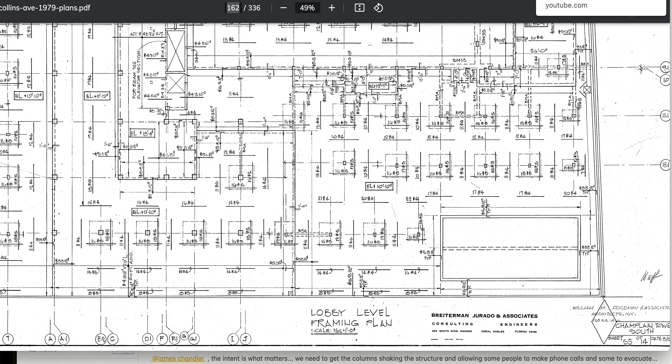Let's get to what my breadcrumb was. I keep telling you guys, I don't know what this BMA is. If I tell you, is it a lateral brace? Come on. And then in the same video, I tell you that this is a transfer beam, and I show you the photographs of how it works. Where is it? We're going to get to my amygdala videos. And I show you in this video what a transfer beam is and how it works. Where's my image? Really?

You suck. Oh yeah, that's my movie. Oh, somebody else liked the movie. That was cool. I saw that in the comments.

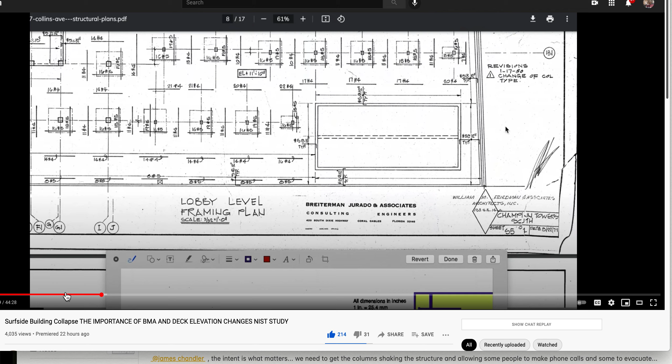Alright, well, so much for that. This one, yeah, so I show you how the beam system works where it steps up the elevation change.

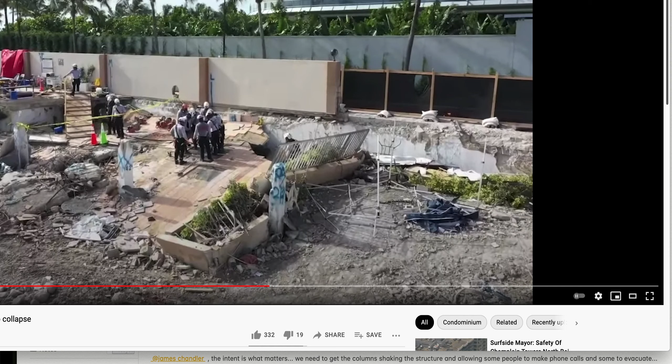I thought for fun I'd do a troll video to show the troll, do at least one troll video that's going to get blocked. I've been in a lady's house, all right?

The one in 611, been all through this video. Some inconsistencies with her stories. Think about it though, she went down to the garage, all right? Do you think this lady uses the stairs every day? So she blew off the floor she should have got out on. So she went to the garage, or maybe she was going to get her car to leave. But she wound up in the garage and then had to come back up. Come on, she never used the elevator, I mean the stairs, so she doesn't know what floor it gets off on. I'm going to give her a pass on that. So we don't have to pick on the lady's story about inconsistencies.

She woke up, she survived. That's the amygdala. She feels strange sounds. I'm gonna give you a teaser in this, the amygdala woke her up. That's why I wanted to say how the amygdala can save you in your sleep. Here it is, the amygdala woke her up. She was asleep, she was off somewhere else in Daisyland. And the amygdala is always monitoring. I state that the amygdala gets data first. And if it's nothing, it means nothing. But if it's something deadly, as the building breaking apart, it wakes the human up and says, yo, we got to go into action mode.

Strange sound, and I run to my living room. And there she spots a crack snaking its way down a wall. The way she points at it, look, right, and then left. Something inside of me said, run. She saw the crack this way, something inside of her said, run. That's the amygdala telling her to process that data, and the amygdala took over, and out she went, all right? That's the amygdala. Her amygdala said run. She doesn't have, this is a lady that has auto run pilot. She doesn't have evaluate data. It's auto run.

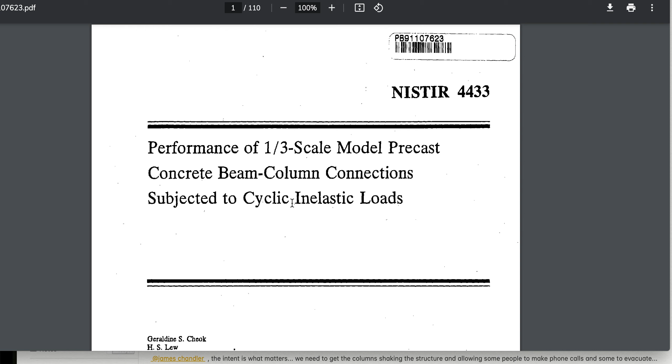So, all right, we're going to get away from that. I already told you guys what a BMA is. People are still asking, but this is concrete beam column connections, cyclic inelastic loading. You can look that one up.

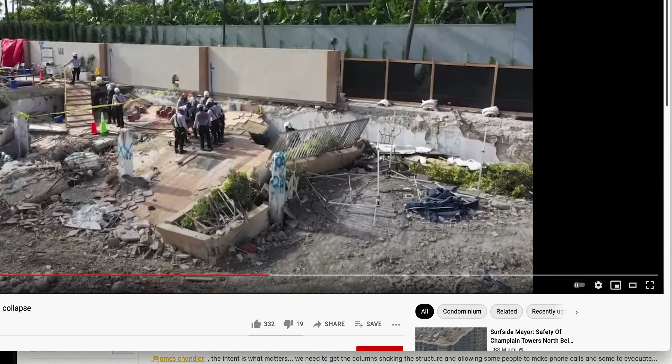Let's go, I'm trying to find the troll guy. Damn it, I guess I won't be finding that this evening. Yeah, that won't happen. All right, the guy that commented about the... we'll get to that model.

He commented about the math of the 11-foot elevation change, and it varies because the lobby is 13'4". Well, 11'10" plus 1'6" is 13'4". So his amygdala couldn't let him go, oh shit, you're right. So he writes back all this long answer about nothing wrong with my math, and then he does his crazy numbers to come to 13'4" by saying 2 inches plus this plus that. And I'm like, you know what?

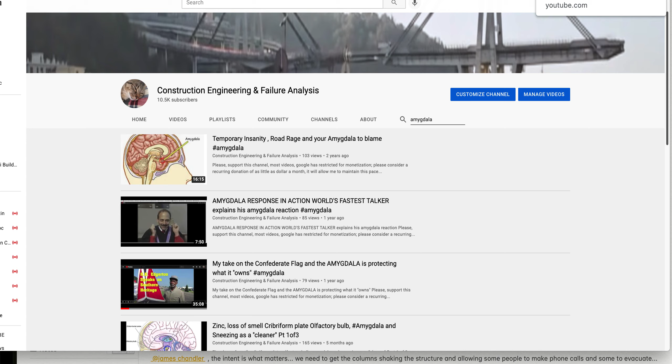One more comment. Oh, is it in this one? Is it in this video? Let me see here. Where's the math guy?

I don't have time for that, so I wanted to show it to you. This is the amygdala though, where the person couldn't admit that his math is wrong. But no, the person rather go back at it again, showing me why his math is correct, and yet it's the same damn math.

What is this? I'm confused on how to read the plans, and a few seconds later we see the plan show S5. Obviously the piece of the bottom corner looks ripped. It presents as ripped. It's a copy, so we don't know if it's actually ripped or whatever's going on there.

I think it's 14 to, well, whatever. Look, the plans are the plans. They're all submitted on this. So we can argue about the dates being the same.

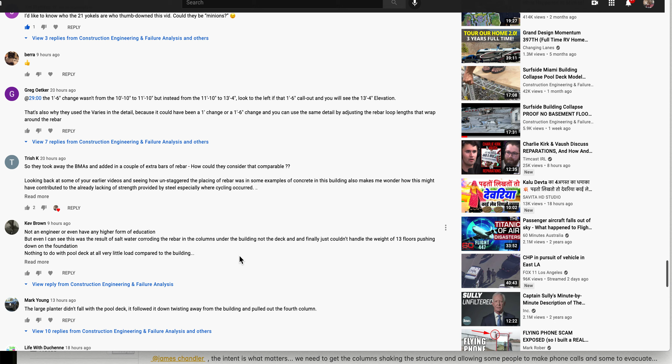So what happened? I don't know if this happened, but I would theorize that the person put the smoke and mirrors in the change plans the same day. It's crazy. You submit the same plans twice, and on the second plan you say change column, but you have the BMA missing.

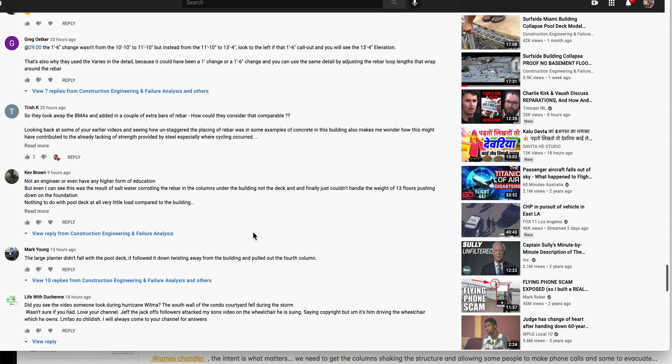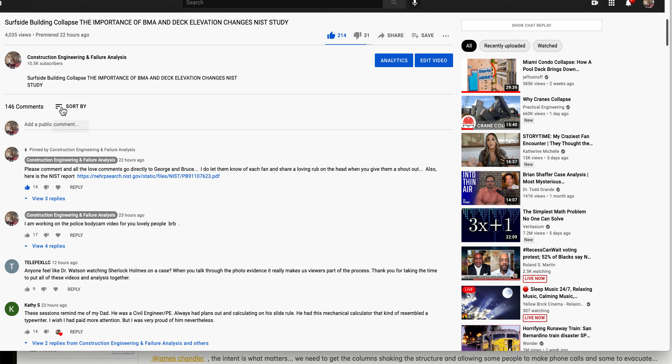So that was 146 comments. I don't know how this works. I'm trying to show you that mathematician person.

So we can get a good laugh out of his math. We might as well get a good laugh every now and then. We don't have to be so damn serious.

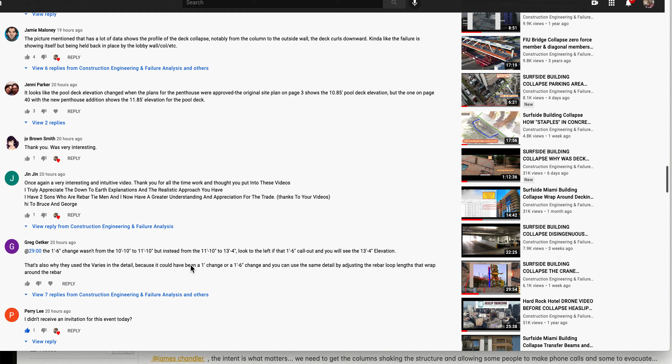Here we go, Greg, whatever that is, Oetker. At 29 minutes: the 1'6" change wasn't from 10'10" to 11'10", but instead from 11'10" to 13'4". Look at the left. Look to the left of that 1'6" callout, and you will see the 13'4" elevation. That's also why they used 'varies' in the detail, because it could have been a 1 foot change or 1'6" change, and you can use the same detail by adjusting the rebar.

All right, look, 29 minutes. He says, look at it. The 1'6" wasn't from 10'10". It was from 11'10".

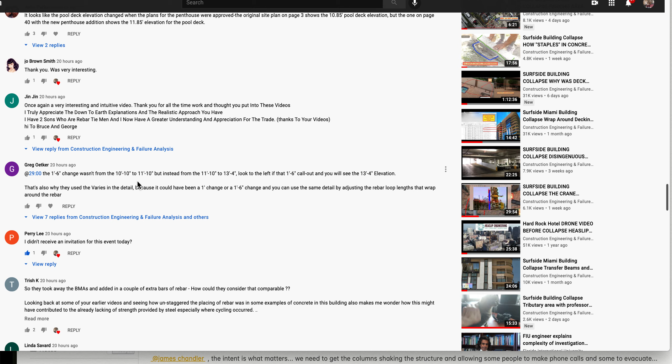Okay, 29 minutes, we click on this. Not change over to here. Pause. All right, there it is. Change. Come on, pause, point out. Come on, screen. All right, so slide this over. There it is, 2904.

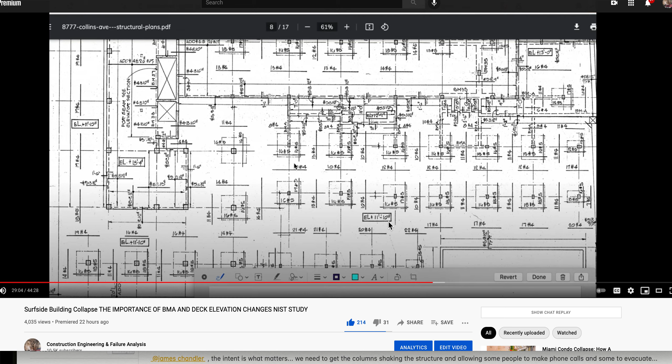Same thing, obviously. This is 11'10" right here, and that's 11'10". 11'10" and 1'6", you jackass, is 13'4". That's the lobby elevation. So 11 foot and 1 foot is 12 foot, and 10 inches. That's 12'10". Then you add 6 inches to that, and you get 13'4".

I don't have time for this stupid shit. So you come down here and you see this, and I told him, I said look, I answered him kind of like the way I answer, just give him the answer saying no, you're wrong, your math is wrong. And then 7 replies: 'Looks like I missed something.'

I don't know, Jamie, I couldn't open this. I have no idea what that is. I had to amend my reply. I thought he found something, but it was my steps. I thought he was giving away my little breadcrumbs on the 4th step.

But I already gave that away in another video where I said, look guys, it's 3 steps up, and now there's 4 steps over there. I thought he was referencing that, and then I realized, oh shit, no, I'm wrong. So I did right, don't give it away, please, because I already told him about it.

1'6" and 11'10" equals 13'4". That means the 1'6" stands true in the statement, and you are mixing up the math a bit. It happens. I gave him an out.

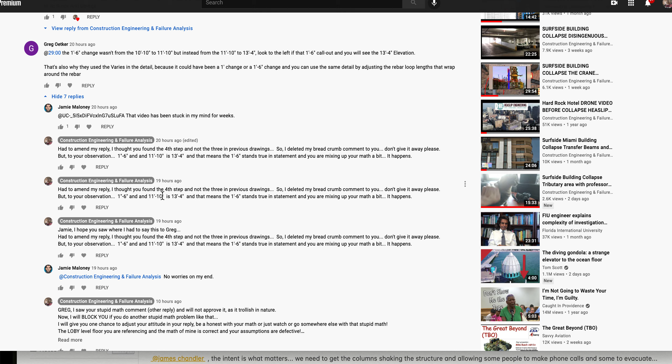He wrote something, so I had to reply. I didn't post it, I said I had to amend my reply. I thought you found the 4th. Well, it looks like I double replied. Whatever, Jamie, I hope you saw that where I had this right.

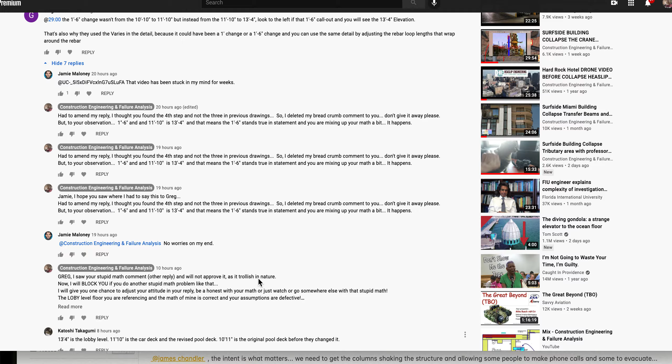Let's see, all right, so it looks like that. 11'10" is the car deck, and the revised pool deck. 10'11" is - that's the original pool deck before they changed it. It's 1'10". So yeah, you get the block if you do stupid shit like that. All right, back to this.

Where's my damn video?

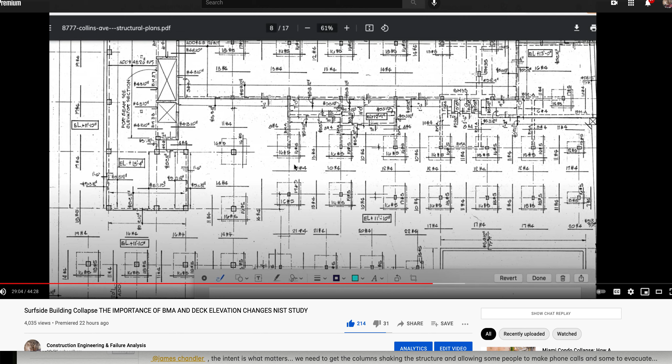And that would have been - let's see if I get lucky, yeah - how it's shaped like this, and how it transfers onto the column that way. Let's see if I can do this again. This time you'll understand.

I want to do it again, and then I want you to tell me what I'm looking at here, all right? I keep telling you, I gave you some breadcrumb about lateral bracing, and in the same video I tell you how this is a transfer beam, and it holds the load going across. And then I also tell you about how there's a 1'10" elevation change here.

I go out of my way to show you guys that, so I'm disappointed in a few of you that you didn't catch it. I showed this up here, and it's how it steps up over here - it's a 1'10" elevation change, a 1 foot elevation change.

Okay, so let's get back to this damn thing. Hold on, bear with me, it's got good content in it for you. So let me screenshot this, open this up, and do this for you. All right, let's do this again.

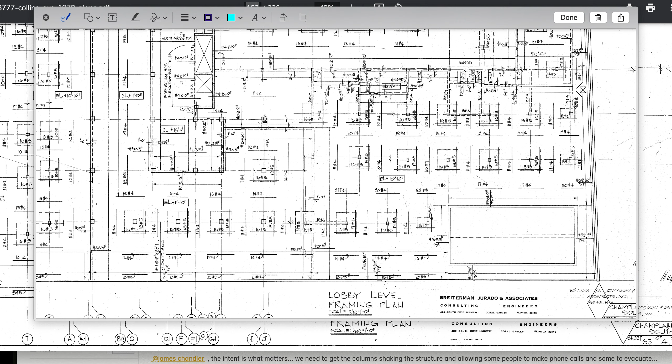Pay attention, people, pay attention. All right, here's your beam, this long beam in the background, going over to that wall. Here, let's do a wall - here's a wall, okay, that's the wall, that's the block wall. That's where this beam would have gone, right here, on top of that wall, or integral in the wall.

All right, so I'll just throw it there for now. I'll do that. Slab went that way. Nope - so it's a BMA, so it would be lower than the deck, and then the deck would go on top. So there's the BMA, right?

So let me text it. This is the BMA. All right, this is text, this is wall. Okay, wall - I guess I should have made it easy to read. I'll do this capital on that W, on the last L's.

So BMA - on top of that little bad boy is the floor. And this would be integral to this BMA.

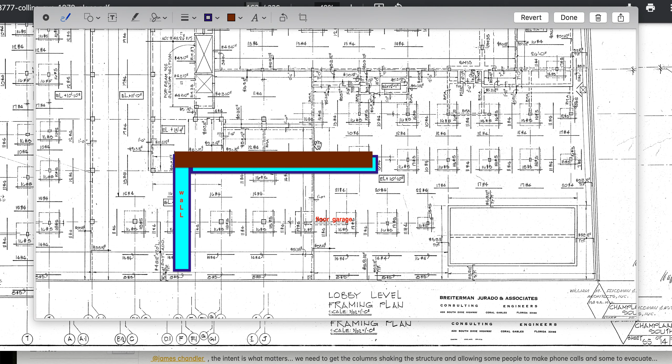Great, let's grab this down here. Let's put the floor - come on, floor. Really? Come on, hand, play along. There we go. So there's your elevation change, the BMA.

I'm sort of giving you a weird look at it, a detail of it. It does go that direction, all the way out to here, and then it turns and comes around. So this will be your BMA, and let's slide them over here - let's just do that.

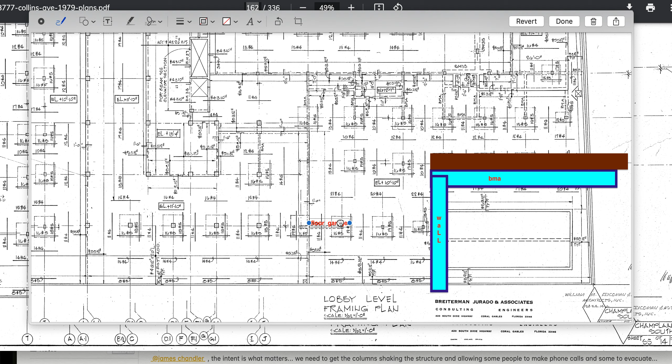So this would be the garage, the garage floor. Great. Okay, that didn't work out - whatever. Color red doesn't work, it hides right in the brown pretty damn good. Let's try a different color then, let's try purple - alright, so...

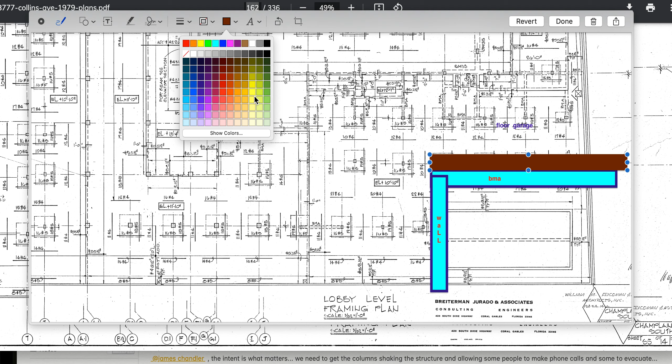Wow. You know what, this one needs to do a different color. Let's make that yellow, and there we go - so we got a garage floor now. Now, just putting it behind it, and so I just do a new text - so here's our garage floor.

Now it puts it on top. Here's our BMA looking from this direction. So your eyeballs are looking here, you're standing on the deck, looking at this garage floor. You'd have to step up about a foot from the pool deck, then you'll be on the garage area out here, right through the planter boxes, and out you go.

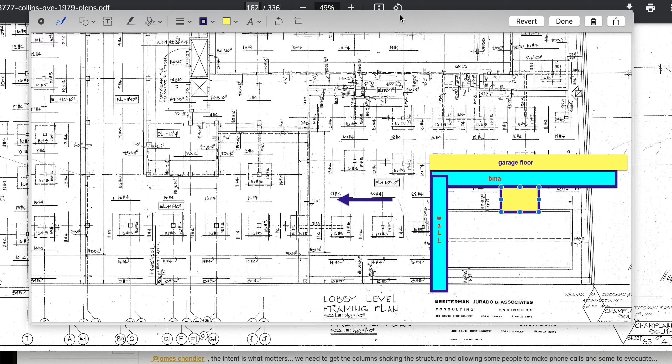Now, I talked about how this BMA works. That in between there is a transfer beam, and I put it in the other video saying 'oh, this is in the wrong place' when I said it, and that would be down. This little box here would be right here, it's in the other video. You guys see this little box there, right there, and that would be...

Let's see if I can just get the damn thing.

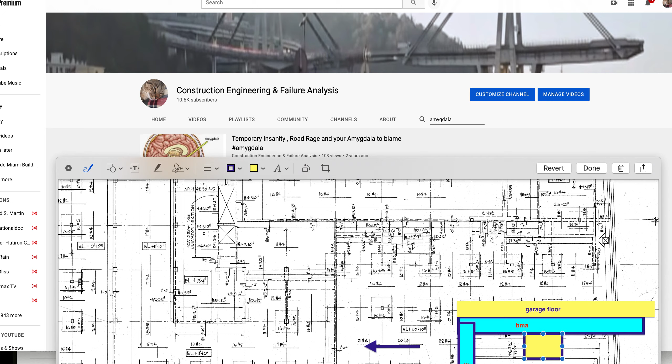So box, right there, and I said, oh, that doesn't quite belong there. That wasn't quite my breadcrumb on that one. The breadcrumb was telling you over and over again that this is a transfer beam that intercepts the weight on top of this one. And on this one, I said I can't figure out what this is, is it a lateral brace? It doesn't make sense to be a lateral brace there. Over and over again, this just tells me if you're awake, if you're paying attention about what I'm saying over here. But you guys aren't awake on me.

You're daydreaming, you're not extrapolating for me. This is a transfer beam. What is the intent of this? I kept asking, nobody's answering. It's a transfer beam also.

Here's the 1 foot step up. To do that 1 foot step up, they also had this beam going around, connecting to this beam, a BMA, over to here. And there was a beam that was going to go around here, same thing, the 1 foot was just going to go around like this. So how do I do that? That's good enough. It was just going around, just going around like that.

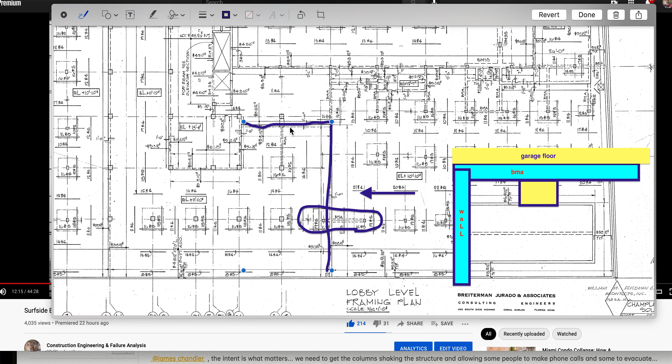And there's your 1 foot step up. That was the patio step up, or parking garage step up, and you step down into the patio area. That's the intent back then: 1 foot step up. You see where this beam is, right here? I'm going to show you in the next page now, let's go look at them.

This is in the way. Alright, so here it is in line here, see how we follow this column? See the line going across? That's in line with that, and there's that column. Now, next page.

That's without the BMA, that's without the beam there. There it is in line, see it going across in line? Now, there it is, going across, in line, 16 fives, 16 fives.

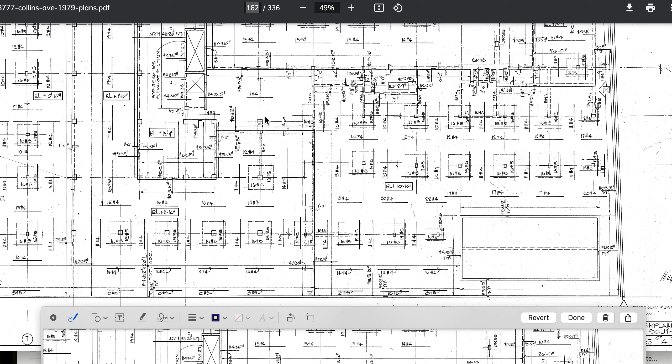Now, this was a BMA, it's not there anymore. They just added this 16 fives, they just put it over here, called it a day. But that's your answer again to transfer beams, we're adding transfer beams for you. That's why this was here, it's not a lateral brace. But you guys, when I kept doing this one, you should have pointed this out.

Now I got one more thing you should have pointed out when I keep giving you all this data. But I'm gonna stop, I think, on this video, and just load this one up, and I'll get you the next one and the next one. I'm gonna have to start giving out ass whippings for you guys not catching on.

This is a transfer beam, and this is also a transfer beam. Especially the engineers who watch me should call BS on me saying it's some type of lateral brace. Is this mass hysteria when I mention the word lateral brace? Am I getting inside your heads and making you think that? That was not my intent. My intent was clearly, in my thoughts, to say no way, just like you just said in the video, no way it could be a lateral brace. So then you guys should have said, oh, it continues over to here, it's a transfer beam for this 1 foot elevation change.

So I don't know if I'm any good with this breadcrumb thing anymore. I think it's the way I teach, though, I don't know if I'm any good at it. Obviously I suck if I mention in the same video this is a transfer beam, and then I show these beam locations, and we talk about a 1 foot elevation change, and I show it in the images, and no one extrapolates out that it's a transfer beam. So I guess I suck with that, or that breadcrumb thing. So I guess my breadcrumbs now, I'm just gonna have to be like, this is a breadcrumb, and then tell you what it is.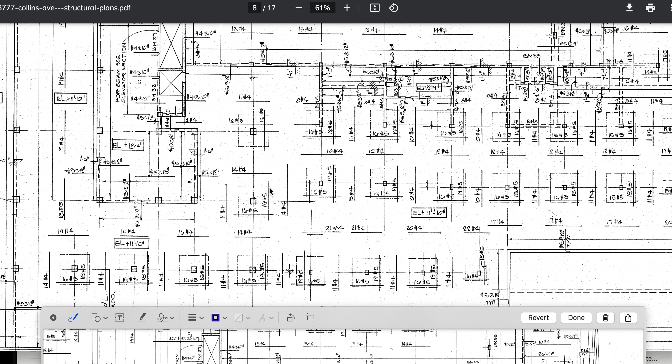So yes, there's your BMAs, there's your BMAs, transfer beams, transferring the loads, transfer beams.

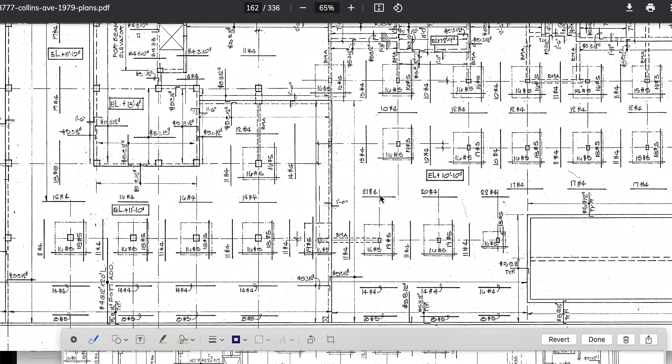As far as now, as far as the witness statement stating that they saw the garage go down first, and then this side over here, I think he saw the very beginning of it, the very beginning of it. I don't think he saw the cars down and then saw the floor go down. I think he saw the wave happen. So this punched first, and then he saw the wave transfer over to here. I don't think it was two different breaks, right? He saw the wave, he saw the wave, he went into freeze mode.

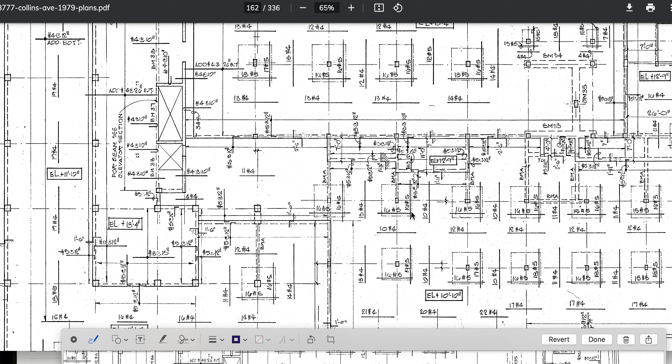Mama Bear comes, I don't know, through the apartment door here, but she said met him at the door somehow or something, right? Because she was like half in a robe, the daughter. And said come on, let's go. And she was more concerned about, I got to change my clothes, basically. And Mama Bear was like, let's go. And that was an immediate exit, with her with the robe on, and somehow she got clothes, right? So anyway, by the time she was interviewed later that night, she had clothes. I don't know who gave her clothes, because I thought she said she was in a robe. Robe of clothes? I don't get how she's dressed later that night when they're interviewing her. Where did she get the clothes from? That's something I would question.

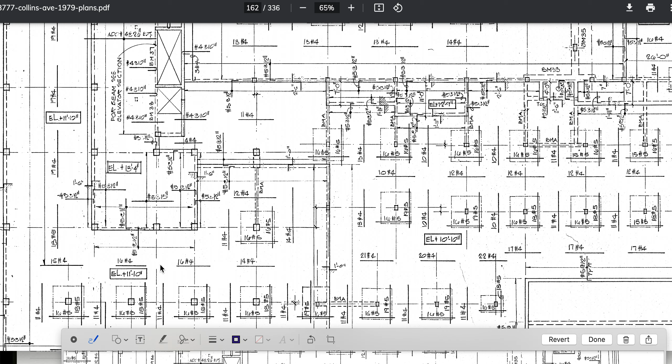Okay, so now you see our deck area is not just this direction. Our tributary failure area is not just the butterfly this way, but we have a direction this way also, because it's connected at the same elevation, 1110 and 1110, and this is 1110. It's the same elevation, all of this.

These cars go down. There's a fracture that's created, right here. There's a very odd fracture created right there. There's a very odd fracture here. Now, it could have been this: when this area collapsed, the building got tugged on from over here.

It caused a rattling, right? They all got the hell out of town. And when it finally collapsed, all the weight of the building just dropped through here and created this new secondary shear.

Or was it like that, even with the structure coming across and then rotating in? Which would then imply that this collapse, we have rubble over top of it at this point, that when the pool deck went down, it went all the way to here.

I don't have that in my mind because you remember he's out here looking, and he didn't say, 'Oh shit, right next to me collapsed also.' He said the parking garage area and the pool deck area collapsed.

Now let's address my first video I made on this. Remember we had a witness, I believe by that time, saying she made a phone call to her husband that there was a sinkhole in the, she called her lawyer husband, whatever apartment she's in, 411 or whatever, model girl, whatever she is. She reported the sinkhole where she saw, where her observations are, and that would have been here, and that's how she observes it from her vantage point, and her knowledge is what she thinks of when she reports it. I do my video from my cell phone, and I say that, and I'm like, what the hell?

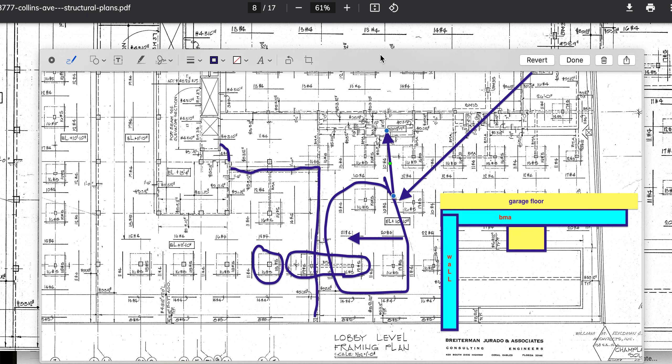In other words, it will want to separate. On this side, it wants to separate more so. Oh wait a minute, I'm looking at the... oh yeah, no, because the other drawing doesn't have... so I got to do confirmation. 10-4, right here it is. Yeah, this is the 11-10, 11-10. So here's the 10-4s, and there's 13-4s. So they match up because I'm working from the BMA installed beams.

Lily's here? Good. Lily's my other stray cat, guys. Lily only takes food. Can you give Lily some food? Because I don't have any food out for Lily. I think Lily is Bruce's sister. She stays here, but she won't come inside. I have a weird thing. I believe some cats are outdoor cats, and they don't want to come in, but they decide that they live with you, they're your house. They want to just protect outside. Well, Lily doesn't want to come in, cold weather or not, but Lily will eat the food off the porch and everything else, all day. I got to compete with the raccoons, of course, because the raccoons will eat it.

Now let's talk about, he was here when he saw this collapse. So when he saw this collapse, this is very interesting. What did they not say? What did he not say? He saw it collapse, and I'm assuming he's on the porch. That's an assumption, that he saw it from here, not from the window. But neither one of these witnesses talk about their floor pulling at this point, pulling away from them.

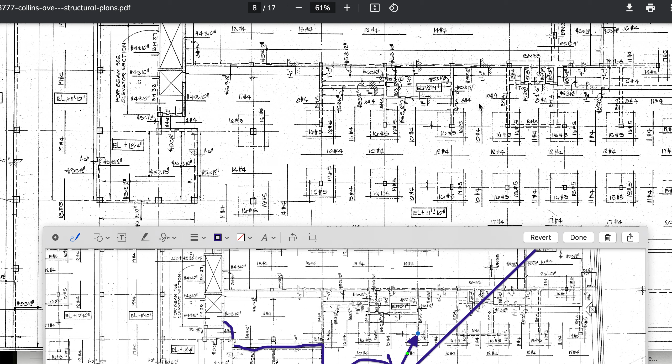The video takes place where they look down this ramp, and we all say it's part of a floor. Well, that would have been this thing tugged here, right? So we're going to cause some failure in these beams now and create a load path issue where the building's able to rattle and hold itself together for about

7 minutes, allowing people to get out. And she makes the phone call. I don't know how long the call is, but the building collapsed while she's in that phone call.

So BMA is getting tugged on from here, and here, after this puncturing happens here. Now so we get our tugging way out here.

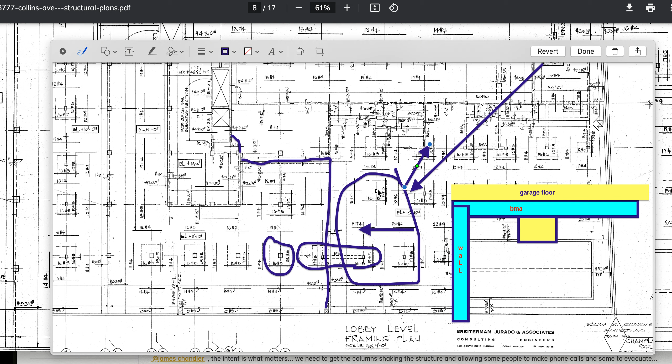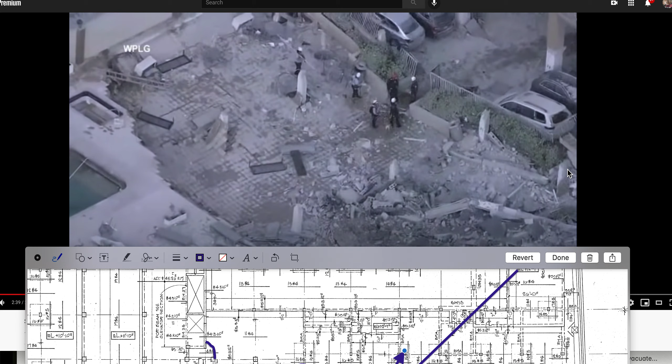Let's get to that. Let's see if I got an image of that one. Okay, so this would be this row here. Right, so there's that structure. This row right here we're looking at, okay, step back, column. This column here. I think that's the column right here. So let me get in line.

These 2 columns are together, and these are staggered. This is off the building where the cars are, so I can't see it in this one. Let's fast forward the video and let it play.

All right, let's talk about the drape first. So here's the drape, it's pretty much down to the middle, right here. Here's the drape, through, so there's our butterfly in the middle, and our drape goes up the other way. But I think that drape, the initial collapse, stopped right there.

I'm sorry, let's see, let's put it back. Let's put it somewhere thereabouts here, maybe. Let's try to stop the car. No cars are in here, so I got to put it back almost on his ass.

It's like right there. He sees this go down, and this would be like draped here, punching around this one, and draped down like that. So this would be from like this point down to here, and then back up to the wall.

I say towards the wall because at one point it has a, let's see, that would be that direction. No, it does this, it's at that wall. It's like this. This area is like that, but on this side it presents more like leaning against the wall, with a little notch out there.

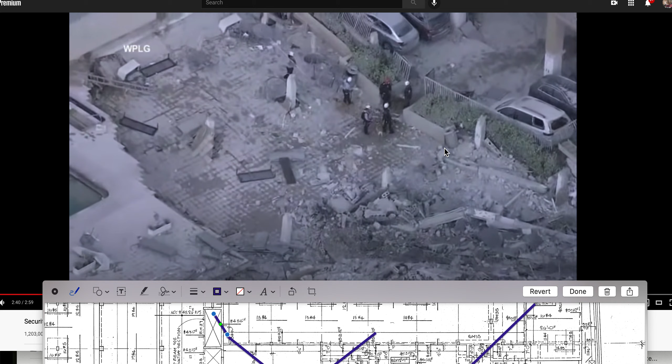Now so we've got this row right here, which is in line with the cars. See, the cars is like I just took an elevator ride down. So that row would be here. There's the pool deck. Yep, 1, 2, and 3.

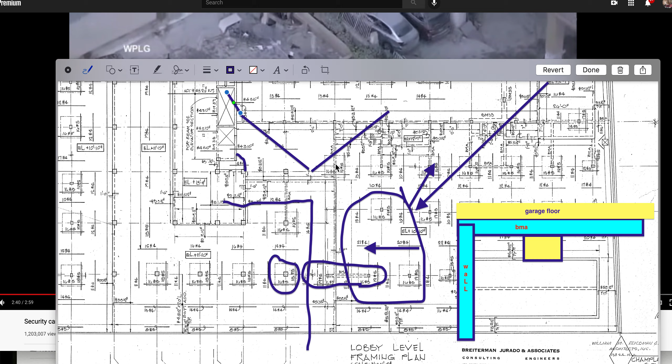1, 2, and 3. Here's the car, the very corner. I believe still where the cars are, so we might be able to see that one. So we know we see 1, 2, and 3 here, right? So right across, let's see, get that right again.

Right across, I'm looking at the middle column where the cars park, so that would be this column. 1, 2, and 3, right here, 1, 2, and 3. So this is that 1, 2, and 3. They're offset from that big column, from the column there.

There's still something out here. Let's go.

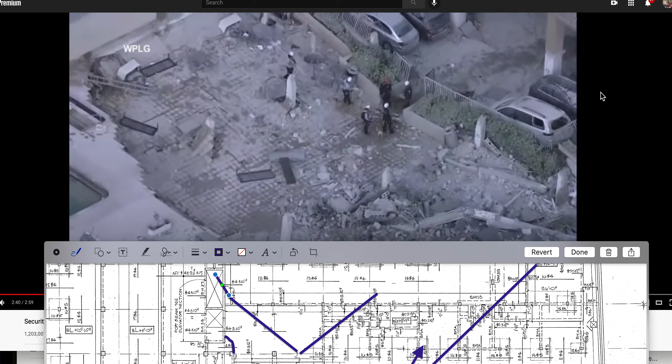In the debris pile, they add they still don't know how many people could still be trapped. So far, ABC News has confirmed

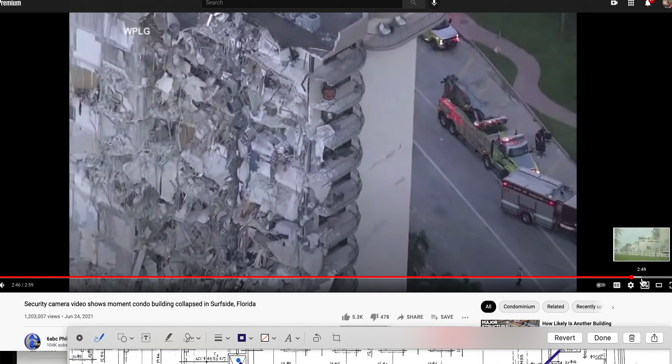So there's our 1, 2, and 3, and there's that column there. This column is still, it presents like there's the punch here of that one.

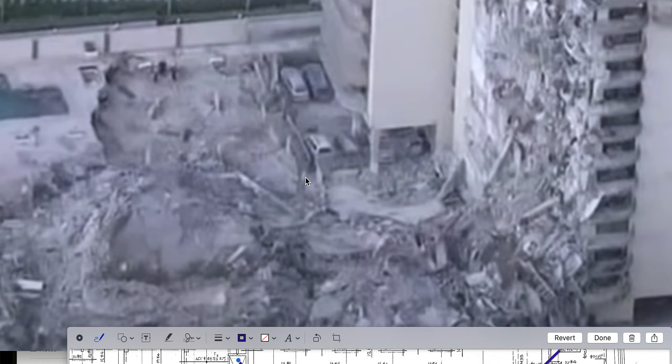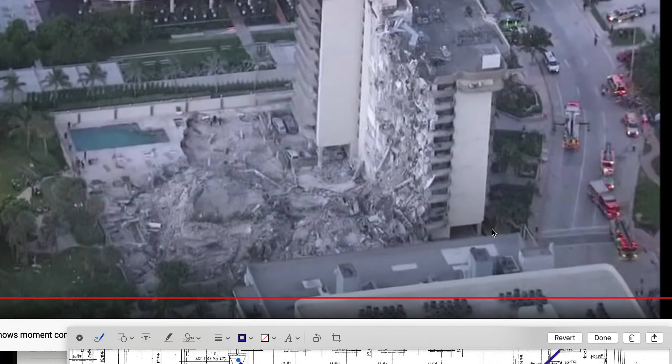Officials say they're concerned about the approaching storms contributing to a potential secondary collapse at the building. In the debris pile, they add they still don't know how many people could be trapped. Officials say they're concerned about the approaching storms contributing to a potential secondary collapse.

So here's our 3, here's our 3 in a row. 1, 2, and 3. I believe this is what he observes from his porch when he exits stage left. He observes the parking garage go down, so it's a little bit more of a drape back to where he is. I think this load busted it, broke it a little bit more.

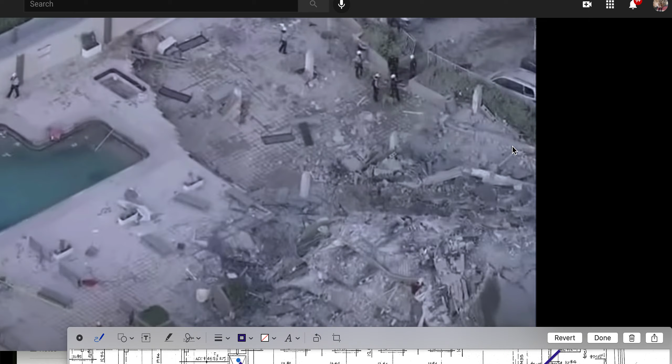Start pulling into this from the tributary area as this goes down, pulling onto the critical shear area, which is connected to the beam, the BMA. It doesn't want to punch because it's got extra steel around it. They're so close together, so it wants to pull a little more because that BMA is interconnected here, really tied in. It might have snagged on all three, maybe pulling the most stress.

Remember I talked about things on an incline? So the most stress, I'm going to biasly say, was pulling on this one, and this causes the failure in this one.

Now, hold on. I can also have it pulling on this one, pulling it away, and then we have an unsupported span from here to here, and this could actually buckle - a different collapse. But I can get tugging from here, tugging on this BMA, and get it to the building without having to just go deck ledger failure. We could have it tugging on a BMA, the deck, tugging on a BMA, pulling it off. So we don't necessarily have to have a deck ledger failure, as I keep stating.

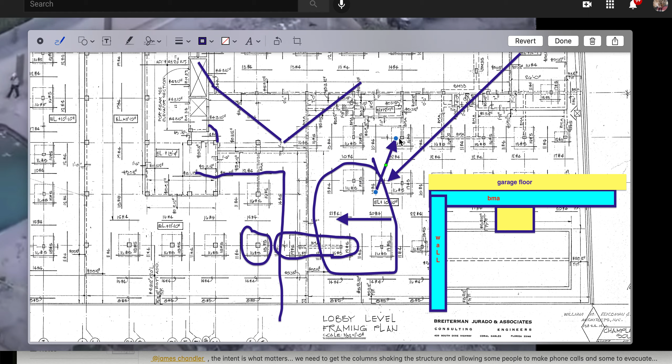by being pulled from the butterfly, from this butterfly from here up to here, just pulling on it - pulling on it way out here, and not equally distributed again, because I think the video shows that this area is where it starts coming down.

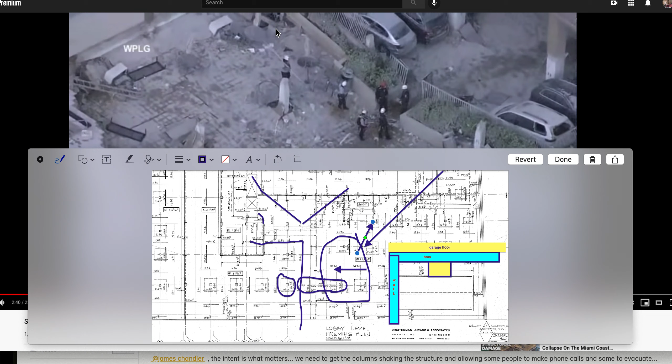Let's visit the Surfside building collapse.

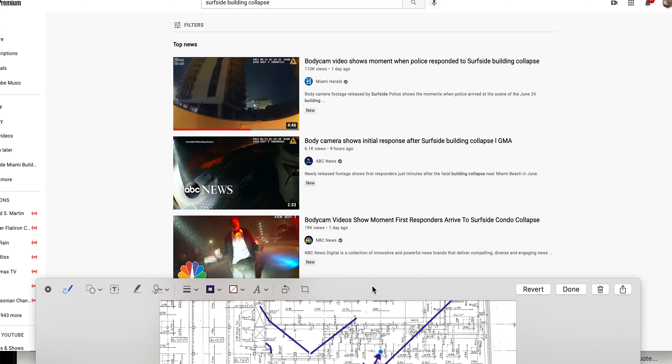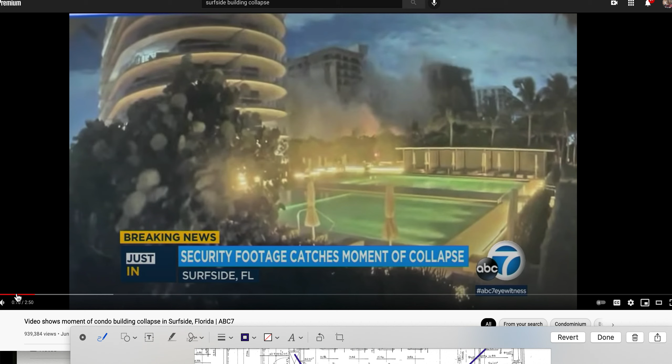Let's find the original camera video from across the street - yeah, the body cam videos. Right now I can't get to you yet on that. I've got the video coming up because I'm arguing with Univision, who claim to have rights to the police body cam. I shit you not. At least whoever's name is on the page with me - YouTube is like, wait a minute, they can't copyright that, and I'm like, yeah, so we're arguing over that right now. All right, so let's go to this.

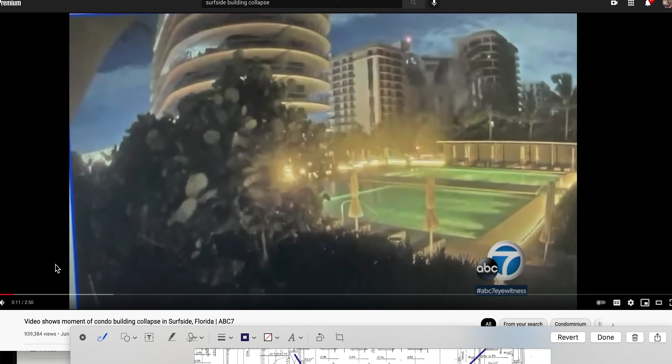Not accounted for - I think it's going to jump in so fast. Okay, really? They jumped in like that? Because we see this being tugged down here, being pulled in from here at an early date, and so this, to me, would be the column that would be failing low.

Just into our newsroom, this security camera video - now remember, this is from an adjacent condominium. Stunning, it captured the moment of - let's see, hold on guys, I got to find this other video.

Yep, of course I wouldn't be on here. YouTube hates me. Yeah.

I was trying to find the original video of it again.

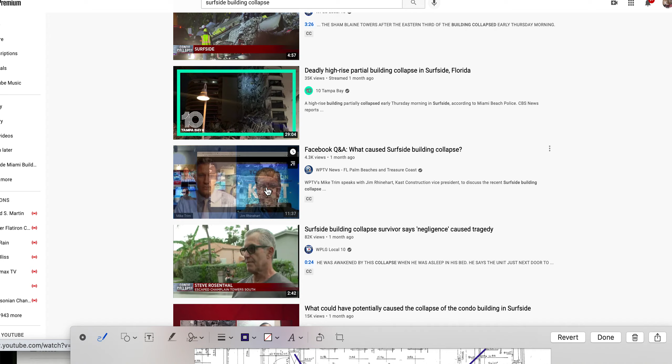Yeah, you guys gotta wait for it. You can hang up and leave if you want, but otherwise hold on. Really? See, we see the - how about that one? Nope.

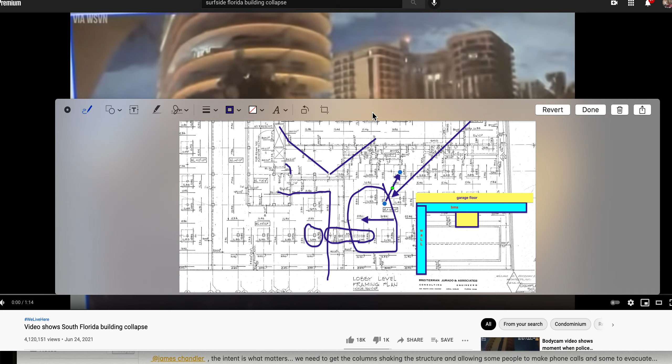Come on, pulling this up. And let me enlarge that - that we can visually see. I think it's 1. I'm picking these 3, 1, 2, and 3. So that puts me over here, and this is my bias BMA.

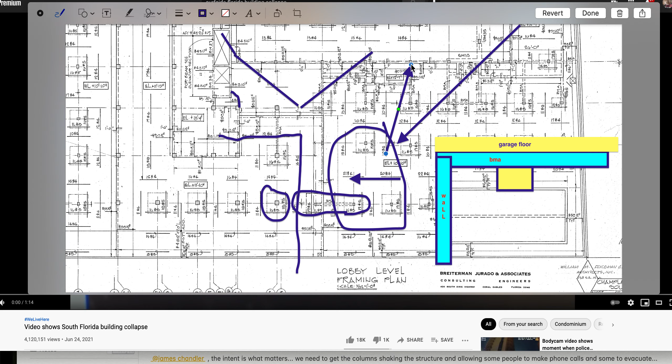Great, and look, everything seems to go that way. Even the roof - you can see like the roof all right there. It's all rotating down there, which means this had to drop first. This area dropping first, that's the plane of the roof. So that's why, let's go backwards.

I'm framing it back. You see the roof plane again? Oh no, that's the back wall. Hold on, no - is it the back wall? Yeah, it's still the back wall. And so there's our drop.

So hold on, that might be good data. Let me back it up. Let's watch the plane come back together. Okay, so it's still tilting that way. It presents as tilting this way.

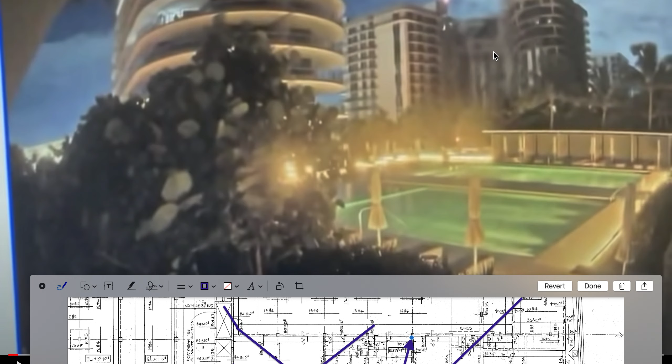And dropping down, so we've already got the bottom buckling. We already had the top floors, so we had this one tear down. And now from here, these guys are coming down together. So not quite - see, it's still coming down together. And there's the angle.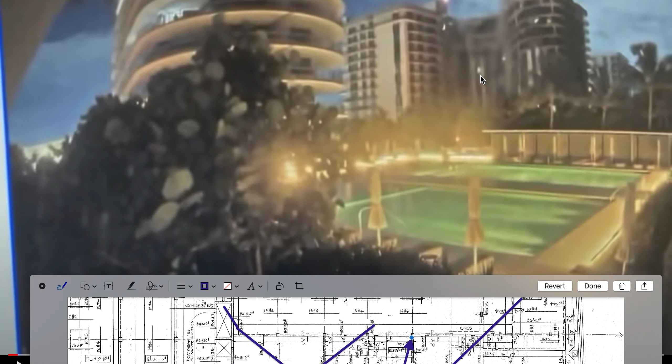And now it starts pulling on the back wall and starts pulling that over into the section here. Lights go out right there. Let's back it up. Hey Bruce - Bruce did a cameo.

All right, so that's why I have it over here. So I have the 1, 2, 3. I've got it right here, the BMA here. And there's the angle of it. I've got the angle, and I've got this already tearing and flexing down.

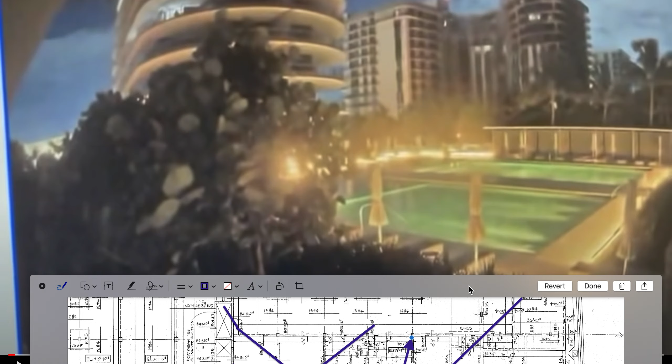To get that to flex down, I have these columns, and there's that bump out. The bump out here is bump out over - is it over here, or is it this one? Oh well, doesn't really matter to me.

This is still my BMA that I have tugged. You tug this one, you cause this one to cripple it. The unsupported spans become from here to here of the floors above. Now they got some tributary action going on also. Out here, the framing of the floors help try to make the span, and they can't make that span.

The framing of the floors, they're steel, so it holds out as long as it can before it just can't hold that span. And so between here and here, you get the butterfly again. You get - let me exaggerate a little bit.

So you get - shit, I should exaggerate better than that. You get this. So between these two, once you pull on this BMA here, this is the one that you're buckling, the one you're causing to fail. So it's in here.

You pull on it, you pull it towards us a little bit. And what happens? You pull that towards us a little bit, this one right here, and you get the house shake. You get the house shaking, you get all this rattling. Even over here she gets some rattling, and she calls husband. People start waking up and everything else.

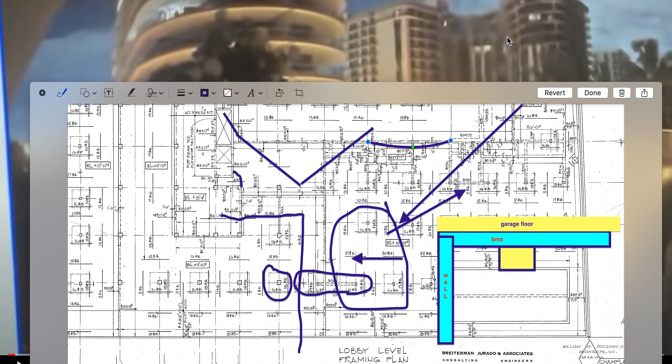So I think this is our single point of - I always thought it was our single point, I always talked about that. I'm thinking that's my bias. I think it's M, is it? Did I keep calling out M on? Is it M I call out?

Can't show that, I'd be accidentally Netflixing. I have no idea what it is. Oh, escape, oops, cancel, back here, escape.

Alright, let's pause that and go to what I think it is. Pull us down. Okay, so here's the BMA, the bump out of everything. To the right, this would be M, I think. Yeah, back to my M, so I went back to my M again.

So it could be confirmation bias on the M. It's definitely not a floor failure only. A floor failure only would just punch down and drop, just like the pool deck did. So this had to pull out a column.

Okay, so now let's see if we can do it differently. This is the parking garage, the entrance to the parking garage. Whoa, back that up 2 seconds. This is the parking garage entrance here. I need to do a different confirmation. Yeah, that's the entrance of the parking garage here.

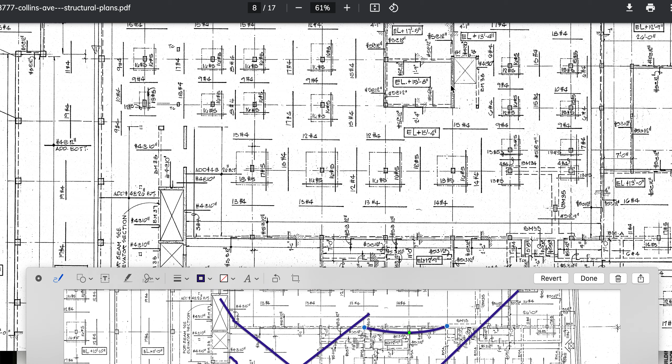But if we tug on this, right? So we tug on this. I'm trying to see what she sees, what the camera sees. It presents as whatever the hell it presents as. You know what, that's not my- I'm getting us to the building failure. I have not gotten us to what exactly. I don't know the construction joint material.

They destroyed all that, so we didn't get to see it in the live video, to see them take apart layers. We would have known had they taken apart layers. You can guess all you want, you can do all the enhancement you want. All you're doing is enhancing dark pixels, and they're all going to be the same. You're going to make up trash cans and ghosts down there, you're going to make up whatever you want.

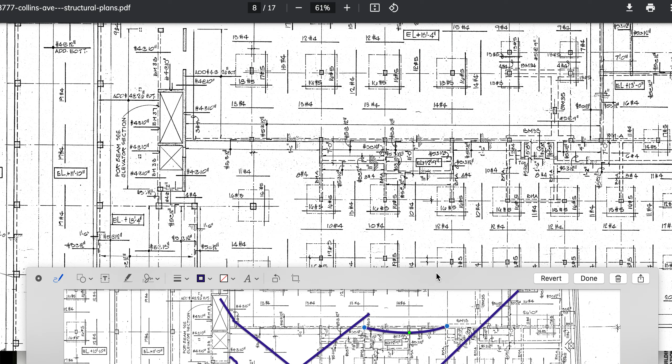So this is where I'm at, and I thought I'd share that with you. So we just get tugging on this, boom, tug. We get tugging on that, you get the tugging on there, yeah, you tug on there. You cause some fracturing in the flooring that drops down, it hits the deck, and this deck separates somehow.

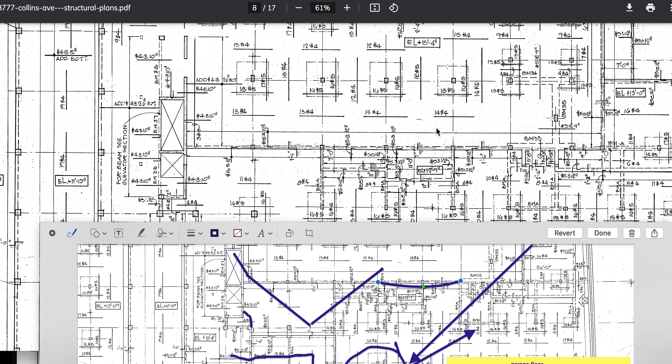The deck, the inside floor, falls to the floor. We got no witnesses from here that escaped that say that. Maybe they went out the door that way, maybe they went out their porches and exited this way from the first floor. I don't know. They could have told us that had they taken this building apart like an archaeological dig, but they did not. They took it apart like, let's put this in the past, and they sold it while people were still being recovered, right?